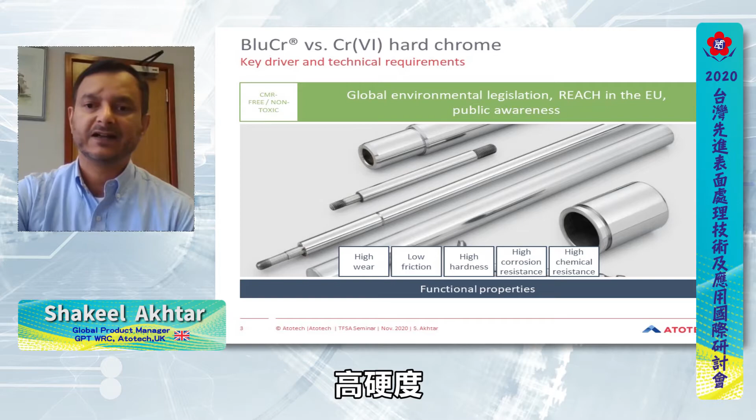The key driving force for developing a trivalent chrome process is the new environmental legislation being introduced in Europe by the REACH committee. The main requirement of the process from the onset of development was to offer the same deposit properties as the existing hexavalent chrome process currently used in the industry. These requirements being high wear resistance, low coefficient of friction, high hardness, high corrosion and chemical resistance.

Hexavalent chrome plating is one of the most hazardous and dangerous processes in the field of electroplating. The reason for this is clear when we consider the different chemicals that constitute the process formulation. The bath is composed of some very hazardous substances such as chromic acid, which is considered a very toxic and carcinogenic chemical, amongst other hazards. Sulfuric acid, which is a highly corrosive chemical, is used as a catalyst in the bath formulation. The process also uses lead anodes, which are converted to lead oxide and lead chromate during the plating process.

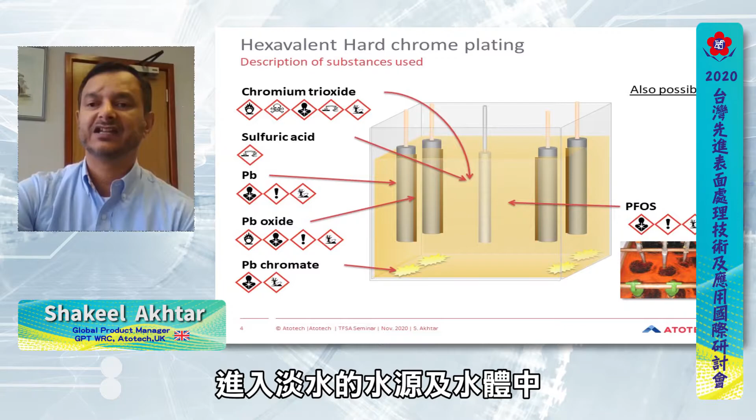The process uses wetting agents to reduce toxic fumes, and the chemistry used for this purpose is using inert PFOS and PFAS fluorosurfactants, which are also considered hazardous substances. Now in the US and in Europe, there is a strong drive to get rid of these forever chemicals in order to avoid high concentrations of these entering freshwater resources.

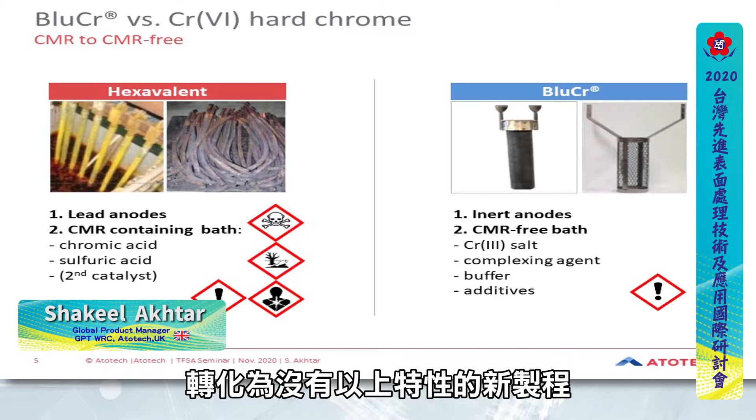In slide 5, we can see how the hazardous nature of both processes compares. Basically, we are going from a CMR to a CMR-free process. CMR stands for carcinogenic, mutagenic, or toxic to reproduction. In 2017, due to the hazardous nature of chrome 6 substances, the REACH committee in the European Union proposed the deadline of 2024 for the ban of these chemicals.

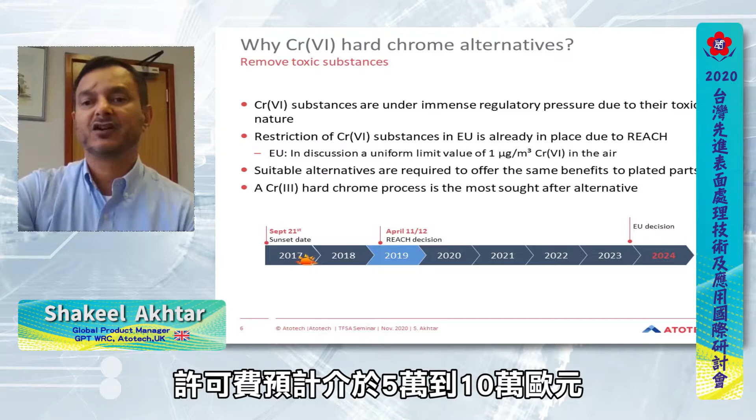The proposal was accepted in principle by the European Parliament, and a decision on implementation of the legislation is now expected in the very near future. This means the hexavalent-based processes cannot be used beyond 2024, and exceptions can only be obtained by license. The major issue here is that the license fees are deliberately set at high levels to force non-critical applications to other types of more environmentally friendly processes. The license fee is expected to cost anything ranging from 50 to 100,000 euros.

So let us look at how the BluCr electrolyte differs from the hexavalent process. As mentioned earlier, the BluCr trivalent process does not contain the hazardous chromic acid, lead and lead chromate, or the PFAS fluorinated surfactants. The chromium is added to the bath via chromium-3 salts and operates at a much lower metal content of 15 to 30 grams per liter. The chrome-3 salts are much safer to handle and are more environmentally friendly compared to chromic acid. The pH of the process is less acidic, and to keep the chrome in solution under these conditions, complexants and buffering agents are added to the bath.

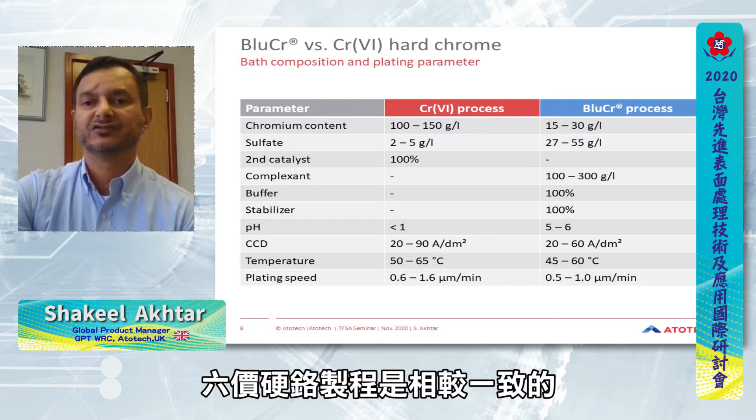The operating conditions of BluCr in terms of cathode current density and temperature are comparable to hexavalent processes. As far as equipment requirements are concerned, due to the corrosive nature of hexavalent chrome processes, expensive PVDF tank material is usually recommended. However, the BluCr process can be operated in tanks constructed from cheaper polypropylene materials. BluCr can be operated with graphite, platinized titanium, or mixed metal oxide on titanium anodes, thus eliminating toxic lead from the process. All other equipment requirements are the same. In most cases, the existing hexavalent tanks can be cleansed thoroughly and used with the BluCr process.

The additional requirement is that the BluCr requires filtration of the bath as well. Slide 10 shows the plating speed of the process in that it's comparable to the leading HEEF process under the same cathode current density conditions and is higher than the conventional hexavalent process.

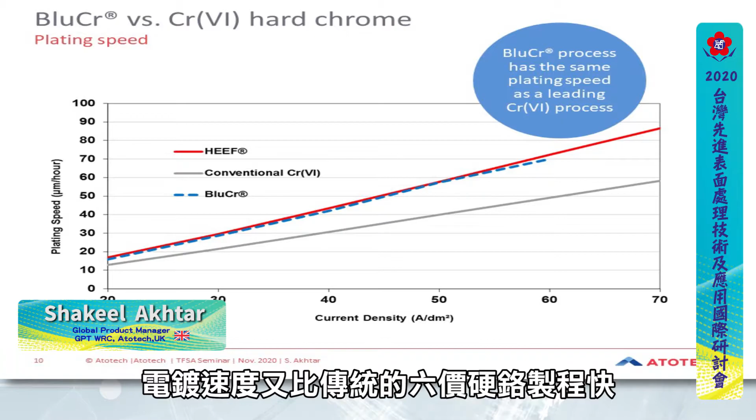The bath life of the process is comparable to the industry standard hexavalent process. We have now operated the bath in our technical center to more than 900 ampere hours per liter to date. And results so far are still looking very good.

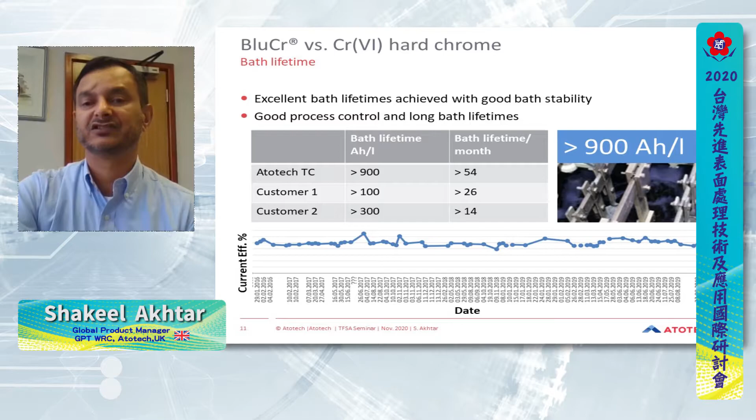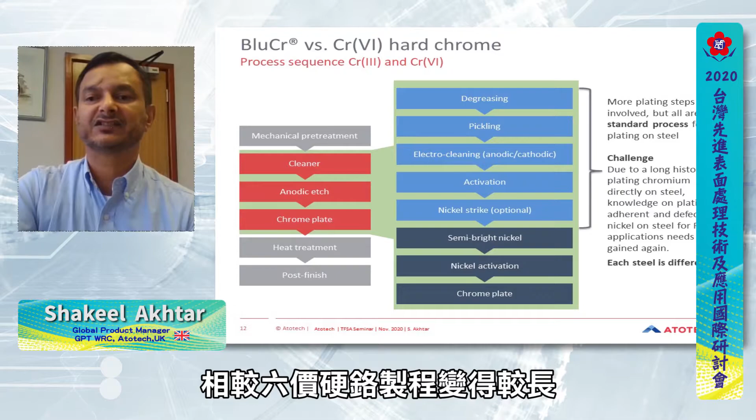In comparison, the BluCr, due to its mild chemical nature, requires the substrate to be thoroughly cleansed prior to plating the chrome deposit. Additionally, it requires nickel underlayer on the steel surface. Hence, the process sequence is longer compared to a standard hexavalent process. Let's take a look at the deposit properties in detail.

Hard chrome coatings are typically cracked due to the change in the crystal structure which occurs immediately after forming. The initial deposit is a hydride of chromium, which is very unstable and loses its hydrogen atoms quite quickly. The loss of the hydrogen forces a change in the structure from a hexagonal close-packed lattice to a body-centered cubic

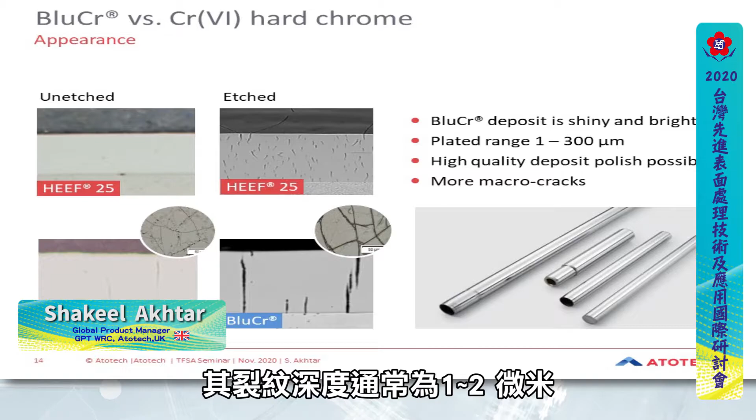With the hexavalent process, the crack depth is usually 1 to 2 microns and can be seen in the etched cross-section of the HEEF process. During the plating, as the thickness increases, the first set of cracks that form get covered and new cracks form in different locations within the deposit.

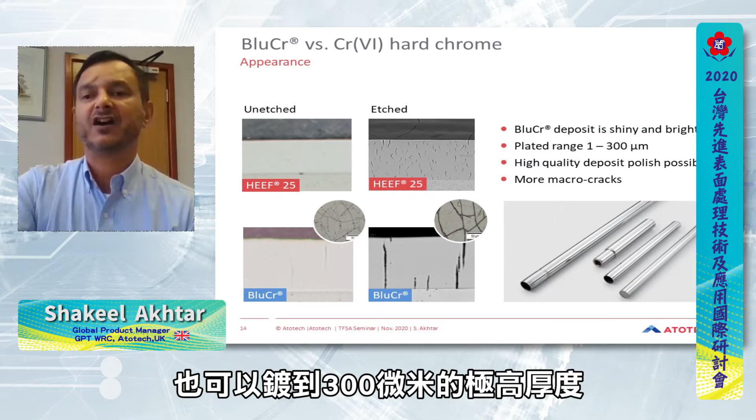However, the BluCr tends to form macro cracks, which have a tendency to penetrate all the way through the deposit onto the base material surface, as seen in the image. As far as the BluCr deposit appearance is concerned, it is very similar to that produced from hexavalent processes, i.e., it looks bright and shiny. It can be plated with very high thicknesses of up to 300 microns.

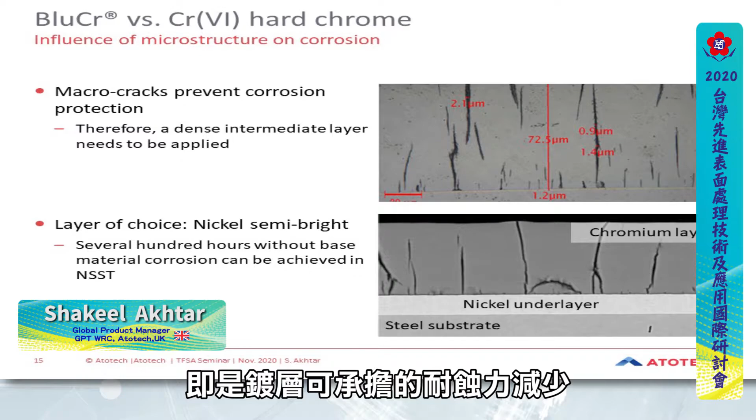In slide 15, we can see the macro cracks at a higher magnification. A negative consequence of these macro cracks is that the corrosion protection afforded by the deposit is reduced. However, we can counter this effect by the application of a nickel underlayer, which helps to overcome this deficiency and provide superior corrosion protection compared to hexavalent deposits, as we will see in the following slides. Semi-bright electrolytic nickel can be used as the underlayer.

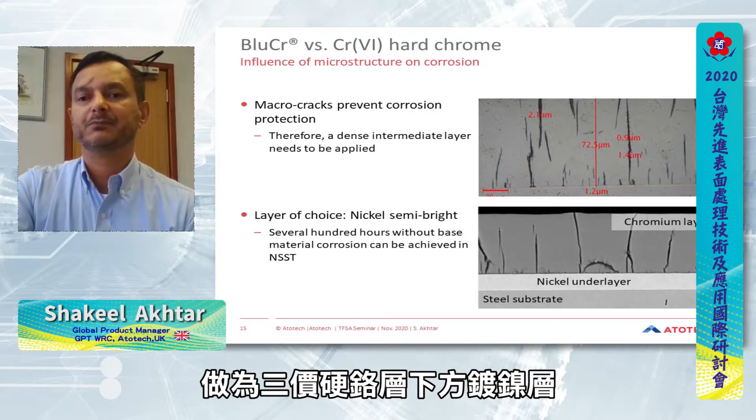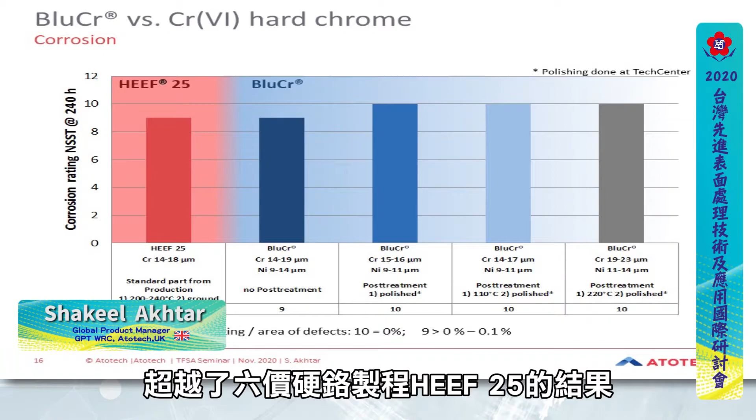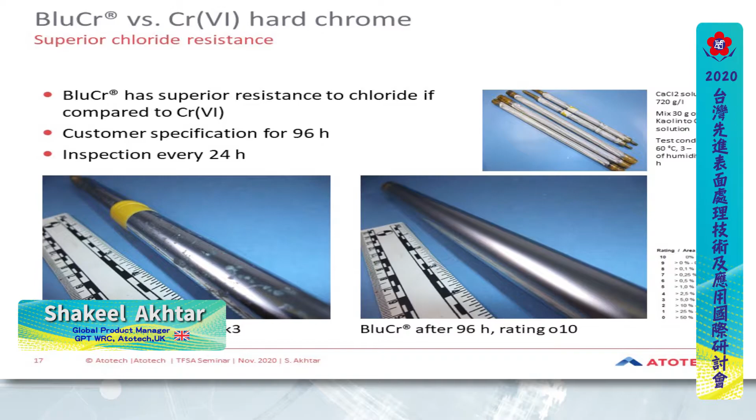These results have recently been confirmed in service on hydraulic bars plated with blue chrome and used in mining equipment in Poland. Blue chrome in this scenario lasted 1800 hours compared to chrome 6 plated bars, which only last for 1000 hours. So we get a factor of 1.8 increase in service life.

The post-grinding induces heat to the surface of the blue chrome deposit, and this results in an increase in the hardness. Slide 19 shows the roughness measurements on the as-plated deposit and shows a higher value than hexavalent chrome, but after polishing and baking, comparable results can be achieved. It is clear from this study that the polishing and baking conditions need to be optimized for a given application or in a given environment.

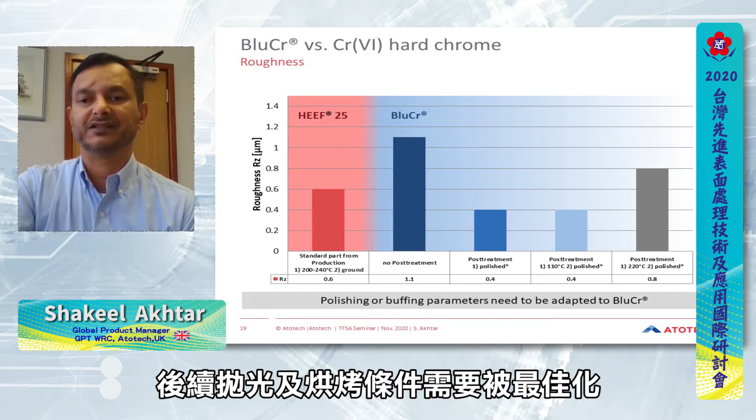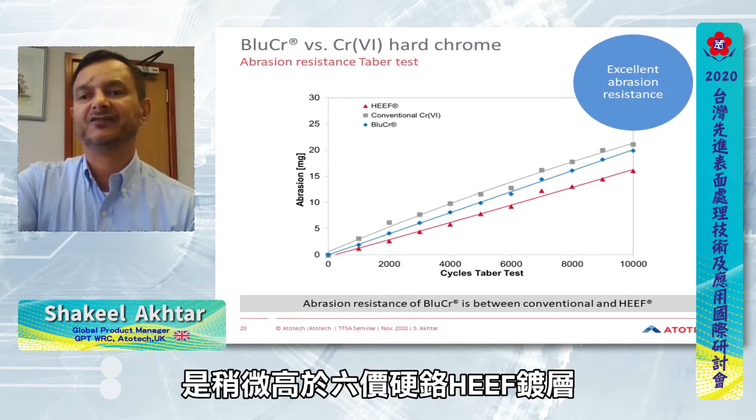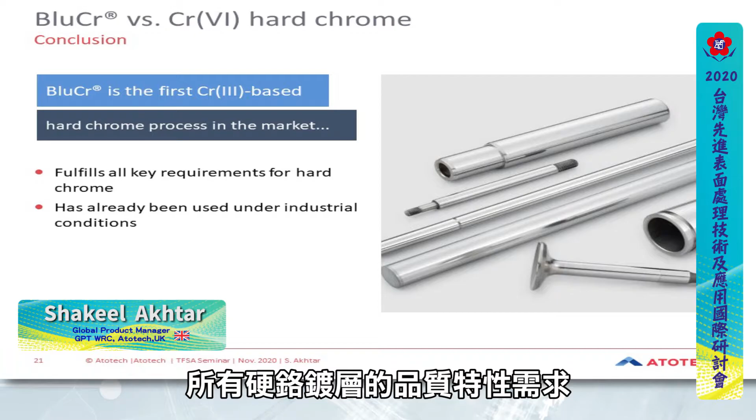Slide 20 shows the wear data for abrasive wear conditions using the Taber abrader. Due to the slightly lower hardness, blue chrome deposit wear is slightly higher than the HEEF 25, but lower than a conventional process. We can state the benefits of the trivalent hard chrome as follows. Blue chrome is the first commercially available process in the marketplace. Blue chrome is a stable process and offers a long bath life. Blue chrome fulfills all the quality requirements of a hard chrome deposit and is a completely sustainable process.

The second process I want to present today is our ELeVEN HP 1050, which is a metal-free stabilized electroless nickel process. The key driving force for this process is the Atotech Green Development Roadmap. The first generation of processes were based on lead and cadmium stabilizers. The second generation were developed to comply with the ELV legislation and used alternatives which were toxic but less than the lead and cadmium. The third generation were based on mixed stabilizer systems using both metal and non-metal stabilizers. And finally, we have the fourth generation, which is our ELeVEN HP 1050, and this is completely metal-free stabilized and thus better for the environment.

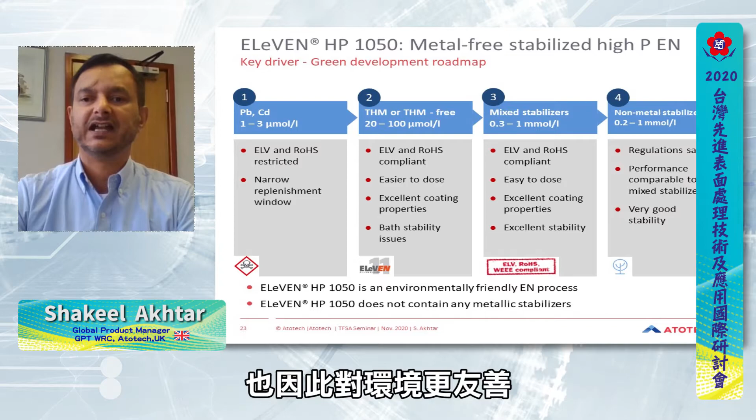The ELeVEN HP 1050 process operates with a 6 gram per liter nickel content at a pH of 4.5 to 4.9. Temperature of the process lies between 86 and 90. Under these conditions, the plating rate of the process is in line with the existing processes at 8 to 12 microns per hour. The HP 1050 has a wide operating window and can operate with bath loadings ranging from 0.1 up to 2.5 square decimeters per liter.

Electroless nickel is a chemical process for the deposition of the metal, and the deposition mechanism has to be controlled in order to avoid plating on unwanted surfaces such as the tank walls. Thus, bath stability is an important factor to ensure trouble-free operation. Stability in the bath is controlled by the use of stabilizers. The bath stability of the HP 1050 is extremely good and is superior to the existing processes over the whole bath life. With lead stabilizers, the beaker stability test is in the range of 1 to 3 cycles. With HP 1050, we are able to achieve more than 3 cycles.

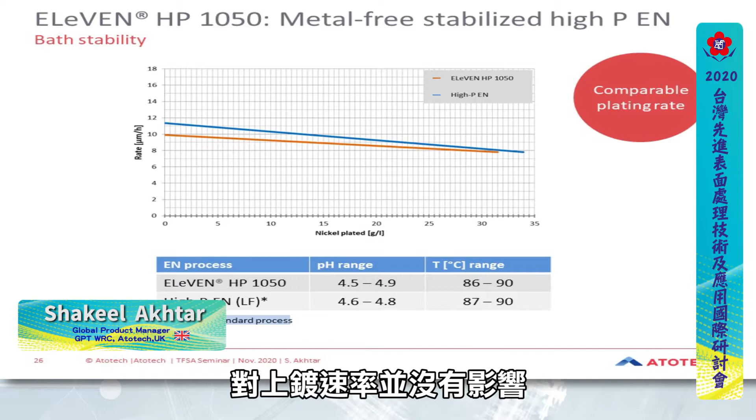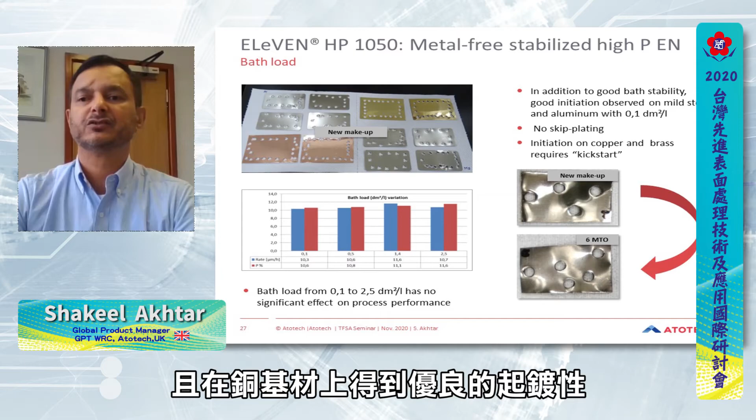The process was benchmarked against the high phos standard bestseller currently in the market in terms of performance. The plating rate of the process over the bath life was comparable to the standard, which shows that the use of metal-free stabilizer has no influence on the plating rate. The process was operated throughout the bath life at similar bath loading and showed comparable results. No skip plating at low bath loading was observed from a new makeup, and good initiation with full coverage on copper substrates was obtained. Next, we take a look at the deposit properties.

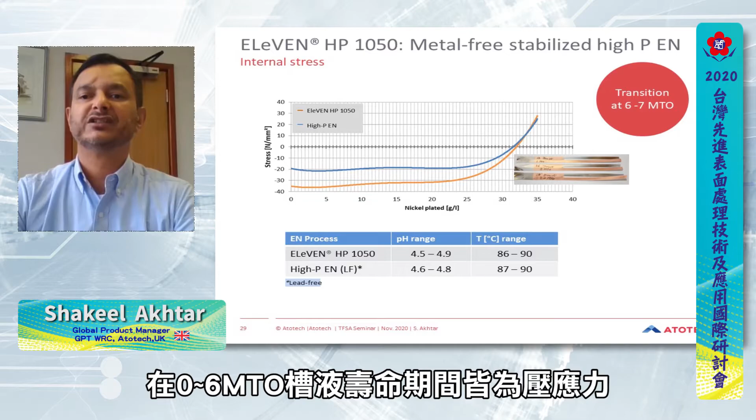With electroless nickel coatings, tensile stress is to be avoided. High stress can lead to cracking of the deposit when plating thick deposits. The HP 1050 process plates with a compressive stress from 0 to more than 6 metal turnovers, and this is in line with the current technologies. The HP 1050 is a high phosphorus electroless nickel process, and as such, the phosphorus content lies within the 10 to 12% range throughout the bath life. This is comparable to metal stabilized systems.

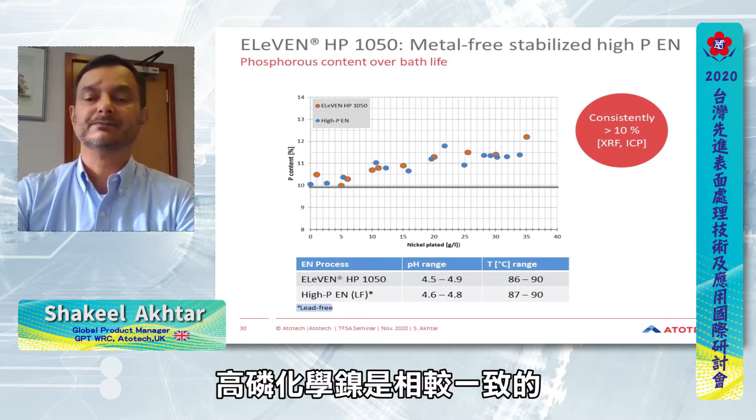The resistance to acidic environments is a critical property of the phosphorus. A common method used in the industry to assess this property is the nitric acid test. Upon immersion in concentrated nitric acid over a 30-second period, no discoloration of the deposit should be observed. HP 1050 passes this test over the whole bath life.

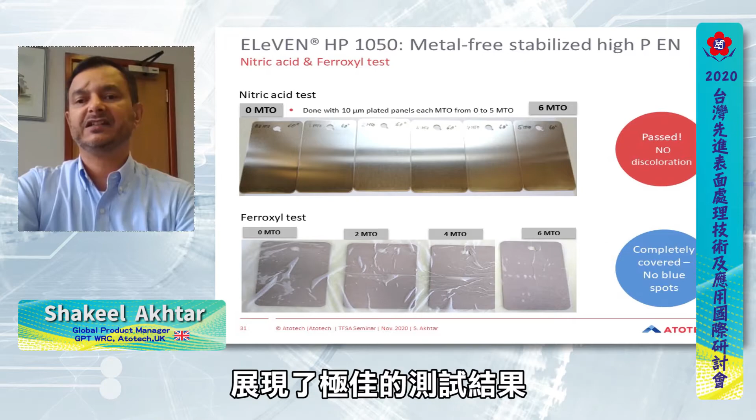Immersion up to 20 minutes also gives satisfactory results. The Ferroxyl test is used to determine the porosity level in the coating, and HP 1050 demonstrates excellent results with no pores over the bath life.

Another important set of properties for electroless nickel coatings is the hardness and wear resistance. Electroless nickel coatings undergo structural changes when subjected to heat treatment. The as-plated deposit is amorphous in structure, and upon heating the deposit at 300 to 400 degrees centigrade, the deposit becomes crystalline. The crystalline structure has a high hardness compared to the amorphous structure as a result of deposit shrinkage.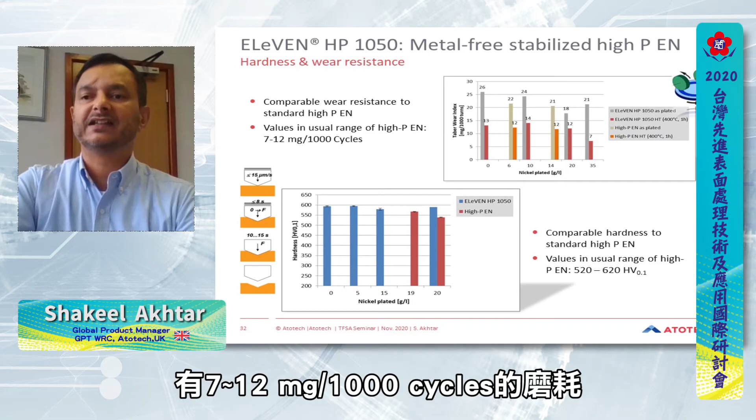The evaluation of hardness shows comparable wear behavior and hardness against standard EN process with 7 to 12 milligram per thousand cycle for the heat-treated sample in a Taber wear test, and hardnesses of 520 to 620 Vickers were measured via a Vickers hardness machine.

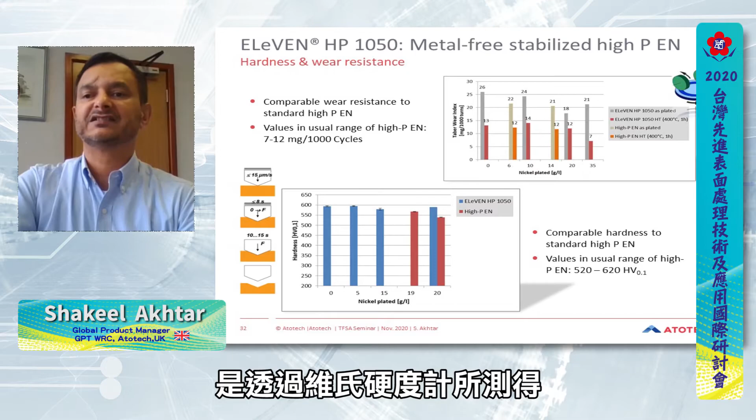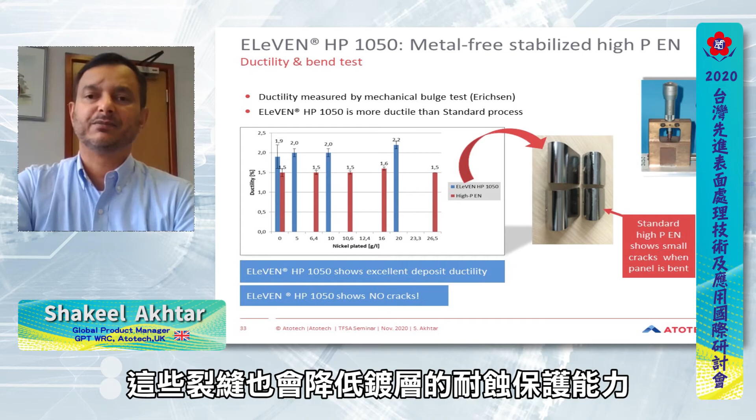This ensures that when deposited on components which may encounter some deformation during assembly, the deposit will not crack. Cracking reduces the corrosion protection of the deposit. For assessing the corrosion protection, a few different methods are used, as we will see in the following slides. One such method is the Kesternich test.

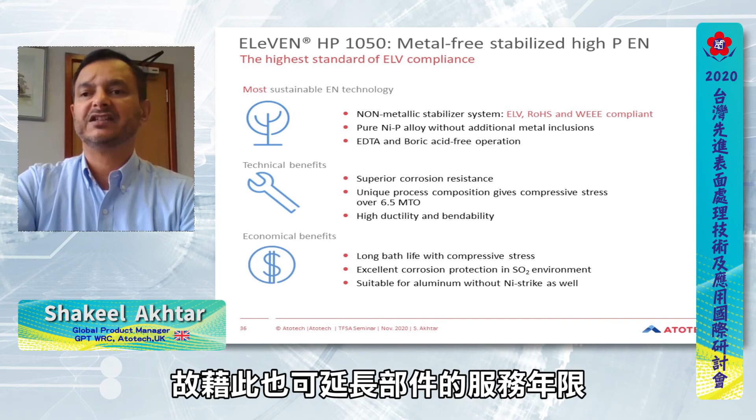To finish, we can summarize both process innovations as follows. The blue chrome process is the first trivalent chrome process on the market. It fulfills all the requirements of the hard chrome deposit, is stable and offers a long bath life. It provides superior corrosion protection as compared to existing technology. It has already been used in industrial conditions.

The ELeVEN HP 1050 metal-free stabilized is the most environmentally friendly conventional EN process on the market. It demonstrates high bath stability and long bath life. It offers superior corrosion protection and more ductile deposits compared to standard metal stabilized processes. It is also in industrial use.